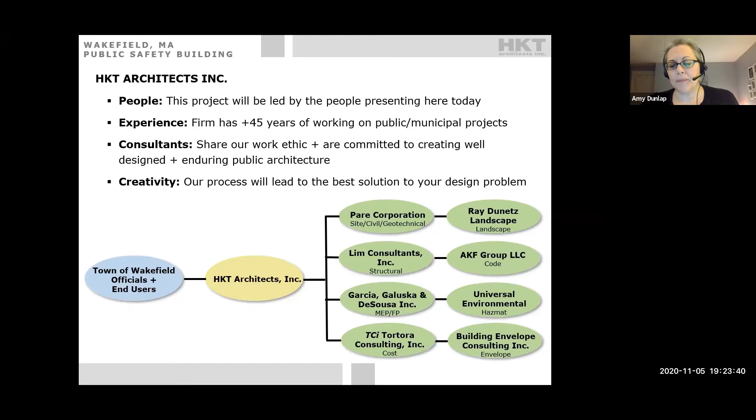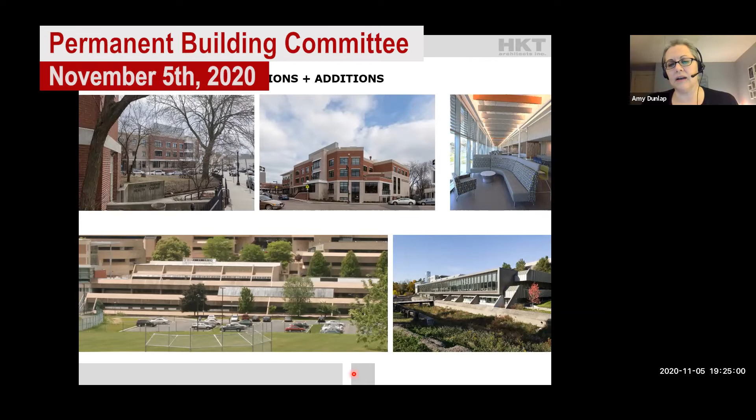We picked a couple of projects here to show you because of their complexity and their similarities to your project. Up here, this is an addition we did for the Codman Square Health Center. It's actually a unique partnership - they also work with the Codman Academy, a public charter school. The Codman Academy rents space on the lower level of the health center, and they work together to make sure the students have access to the staff and are mentored and learn about careers in healthcare. This was a project where we did a large-scale addition and renovation to the health center.

At the same time, the health center and the school needed to remain fully operational during the renovation. So we worked with a construction manager to target almost surgical renovation bits. We would quickly renovate office spaces or conference rooms into temporary exam rooms so they could continue seeing patients all through construction. We'd work with the CM and the healthcare staff to make sure all the timing worked perfectly so none of their patient care was interrupted.

And for the school, we worked to make sure all of their classes remained in the building. All of the work was done over summer vacation and winter vacation so they could continue educating the students. And this below is a large-scale renovation we did for Holyoke Community College.

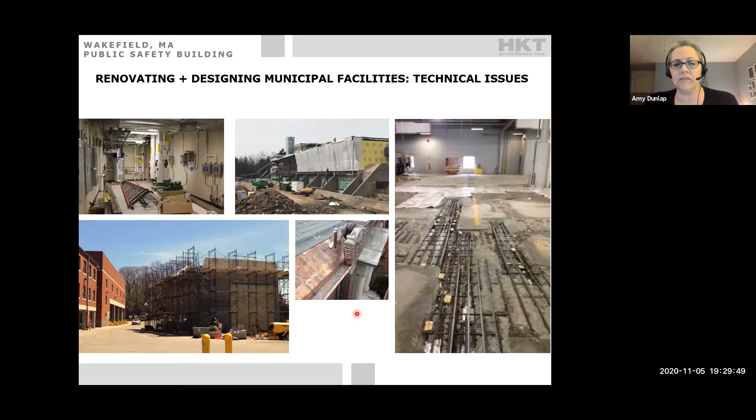But public safety buildings are what a lot of our work is these days. We have a project right now in construction in Tewksbury - it's a fire station. We have a project in Ashland, Mass. - that's a public safety building just going out to bid. We have a couple of public safety buildings that have just finished their feasibility studies, and communities are going to be going for funding in the spring.

It's a lot of what we do and what Janet and I do together. We know the different specialized spaces that go into them, and we know how to make them successful and really meet your needs.

We listen to what you're looking for, and we make sure that we respond to it. I know that you've had some issues with your entry sequence and how the public interacts with the meters and greeters in the station.

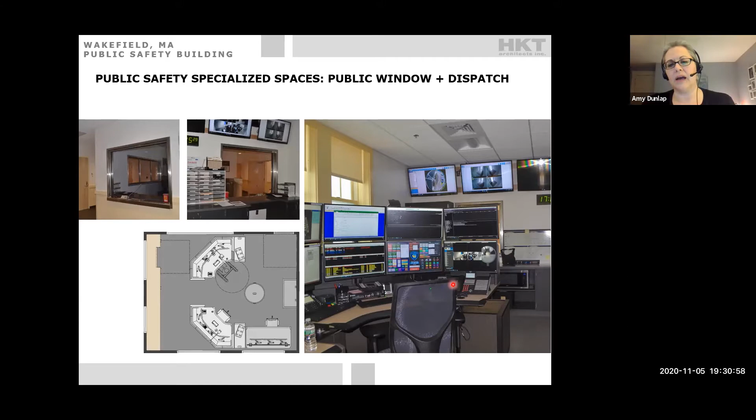So this is an example of what a modern day station should look like. You should have a window where the public can come up to, where the meters and greeters can meet their needs and talk to them, and yet all of your dispatch equipment is concealed behind that with all these large screens that no one in the public can see.

There are lots of other people spaces that go into these public safety buildings, and we believe it's really important to make sure that they have lots of natural light, that they're good working environments for the people who are going to be there day in and day out.

And Janet, you want to take this over? So I'm going to talk about what we've done on our study. We were asked to review the existing facility, evaluate safety and operational aspects, evaluate the current and future needs, and then develop a plan to meet those needs. As you all know, the building was renovated and the addition was done in 2003, so it's a relatively young building, about 17 years old, although the police station building itself is from 1950, so it's a much older structure.

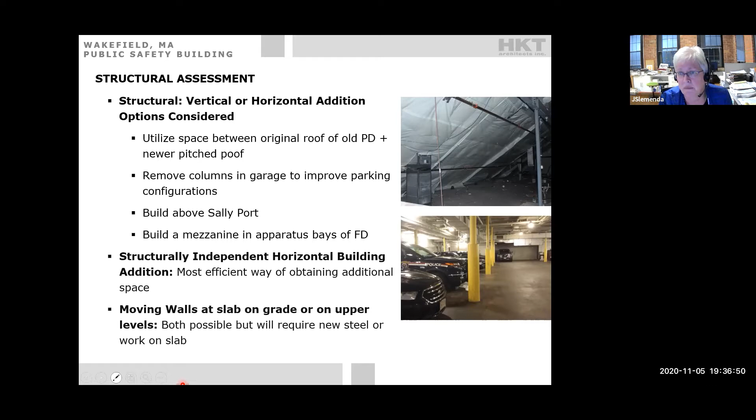So we did a pretty extensive structural report. And then the other ones we did were mechanical, electrical, plumbing, and fire protection. Basically, you've got good guts in the building for electrical, plumbing, and sprinkler systems. There could be improvements in the electrical department, but it's just at the midpoint of its expected serviceable life. You can certainly reduce energy with LED fixtures, things like that.

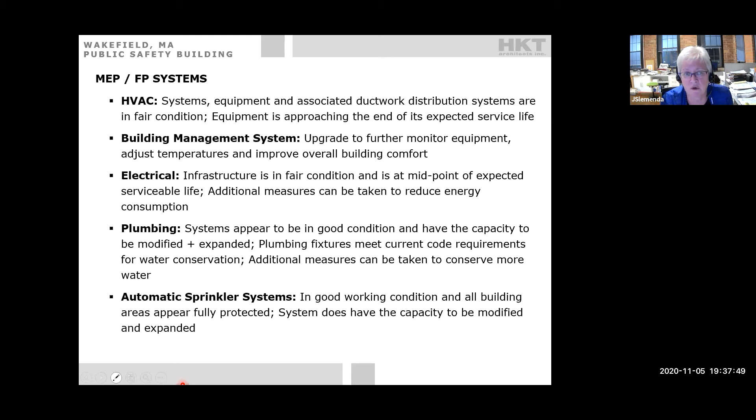Plumbing was in fairly good condition. They meet code requirements, and the sprinkler system has capacity to be modified and expanded. The big one is the HVAC system. It's already at the end of its expected service life, and it's where we see the most problems with maintaining proper heating and cooling. You can see it in the 911 area - they've had to add little split systems to keep the individual spaces functioning well. So we know that's a big issue.

What we did through programming - you probably all know this, but I'm going to go through it quickly - what the challenges in the lobby are. The entry sequence does not really work for either department. There is a records officer there sometimes, and they do firearms work there, but there's no meeter and greeter there 24/7, as in most public safety facilities. To get to the fire department, you have to know to go to the end of the hall, enter a door, and go down the hall to get to that office. So people that need immediate help, coming to the police department and the fire department, oftentimes have to go pick up a telephone and call someone.

Not a very good situation. I was at many meetings in this building and can't tell you how many times I personally witnessed people being interviewed in the hallway or in the lobby with other police officers, fire personnel. It felt like I was invading their privacy. So I know that it's a bit of a challenge.

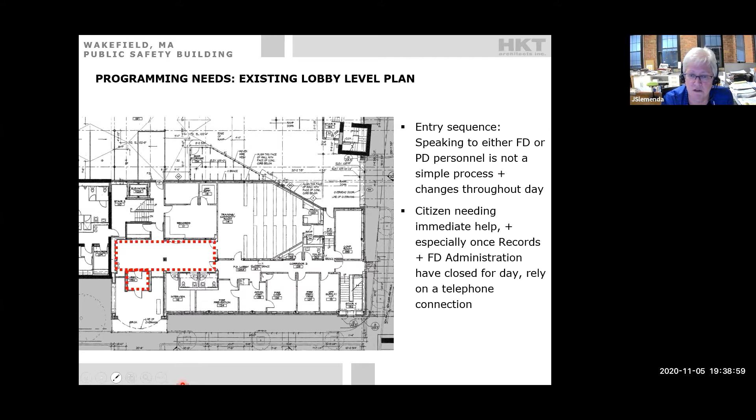On the next slide, you'll see the details of what's on that lower level. The police department is actually on 6 different levels of this building, so the floors do not line up - the addition does not line up with the existing building. In the lower level, they are pretty jammed in. Small rooms that were originally planned for armory and arms storage are now occupied by personnel - those are the green shaded areas. Most of the rooms are essentially undersized, especially the roll call, lunch rooms, and locker rooms. There's a problem with generally all those spaces.

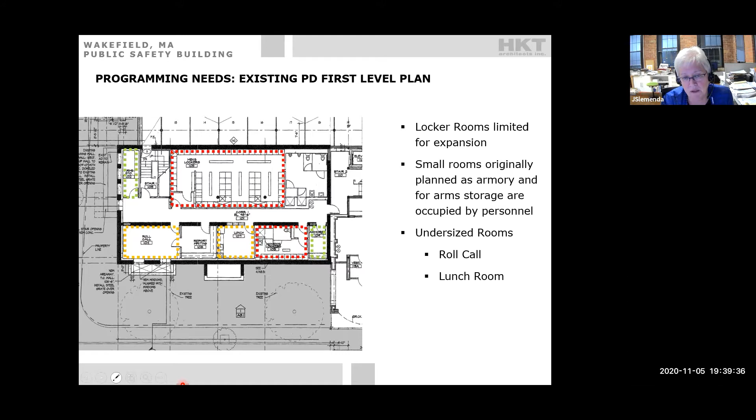The next slide shows the problems on the second floor: the dispatch location and the officer in charge location is remote from the public and doesn't really meet the needs of the current community. Their one green conference room is the only conference room for the entire police department. It's rather small, with a lot of furniture inside to store records and have a meeting room, and there's no room for expansion in any of these spaces as it exists.

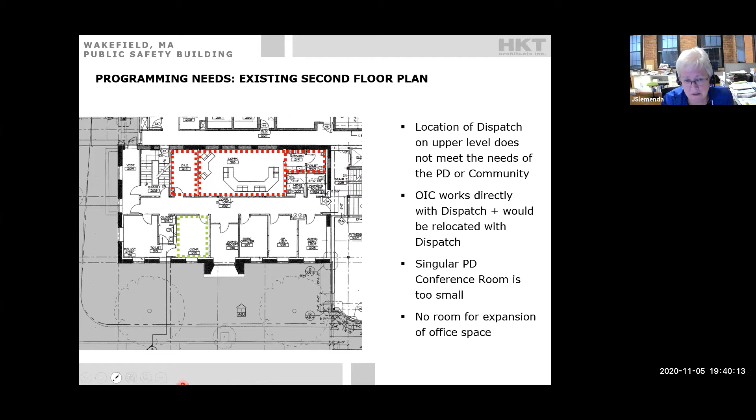On the third level, it works pretty well for the detectives. The big problem is where the evidence is - it could be larger and better located. The one thing about evidence is all about chain of custody: where does the police officer enter the building with evidence, what does that person do with it, so the whole process of moving it from collecting that evidence to being tagged and bagged in a secure area. This particular evidence is on the top floor, very far away from where any of the police officers enter the building, enter the vehicles, or enter the Sally Port locations.

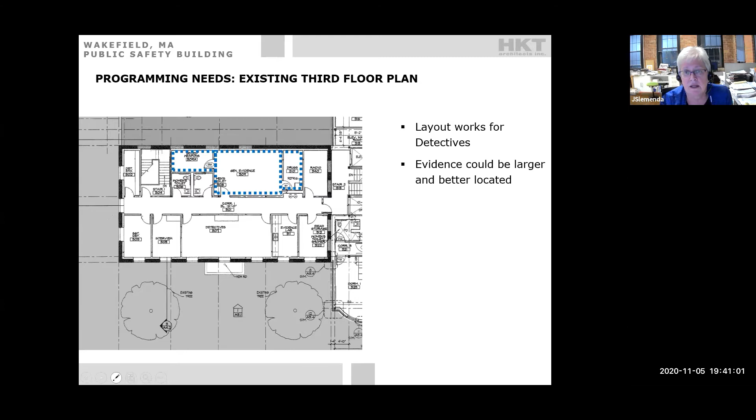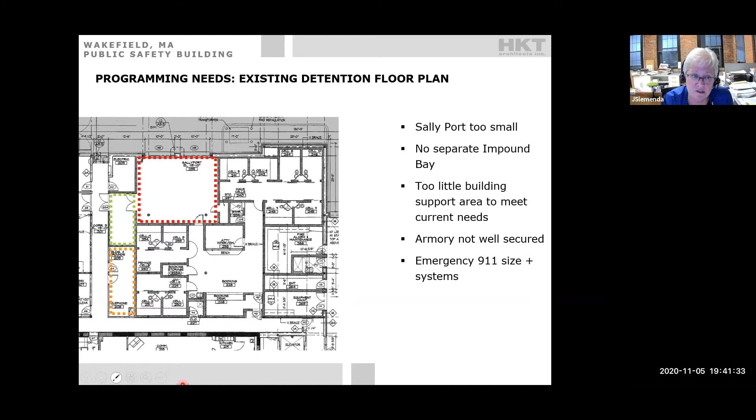Next, in the detention area in the rear, the Sally Port is rather small. There are columns in the corners which create problems. They have no separate impound bays - there's just simply too little building there to support the current needs. There's also an armory that's not well secured; there's a door from the Sally Port into the armory, not such a good idea. And the 911 spaces and systems are not in the right locations. And of course, right above those is all the mechanical spaces on the roof.

So here's your existing floor plan. You know what the building is. It has underground parking, and it's on a hill. There's underground parking underneath the main floor on the upside of the hill. On the lower side of the building is the entry and the community room. The police department is to the left, but on a different level.

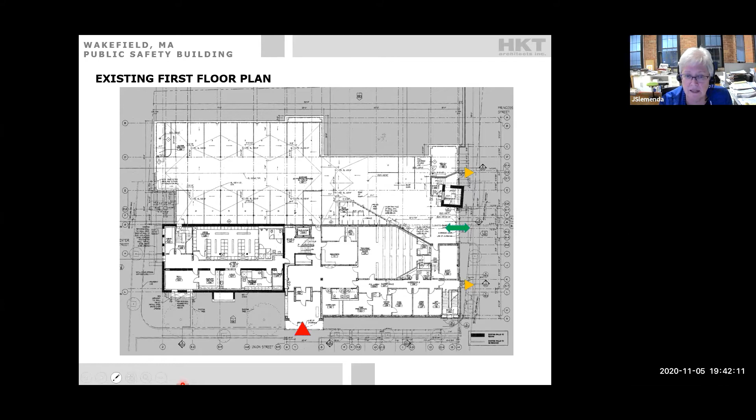That core space with the stairs and elevator is quite complicated. Elevators get you to each of the floors, and stairs move you up and down to traverse those 6 levels. So what we proposed is to add to the building, to move the entry, to add to the front of the building, and to reorganize the sequence.

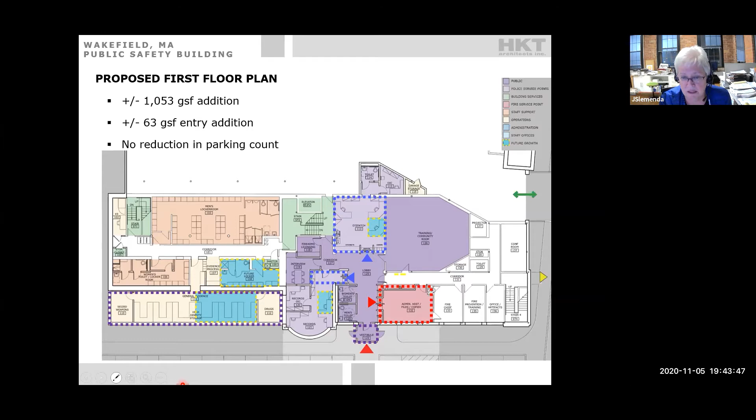The next slide is the second level up, and this is the level where the apparatus are. You can tell that the apparatus floor is above the community room that you probably all met in, and it goes out underneath that big apparatus bay. The Sally Port is up on the upper left with the double arrows. That's where the apparatus come in and out. And so that's the plan above parking and above the first floor.

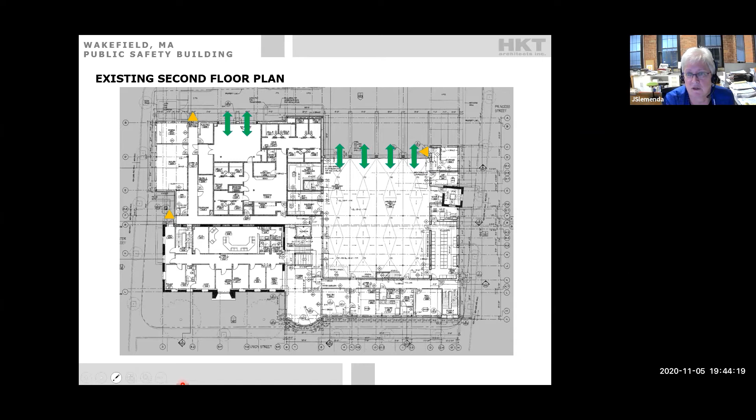What we proposed to do here was do that same addition in the front of the building and pop out the rear where the Sally Port is. Unfortunately, we can't go wider there, but we can get some depth to it. And by doing that, it allows at least the doors to be closed when they're transporting a person who's been detained.

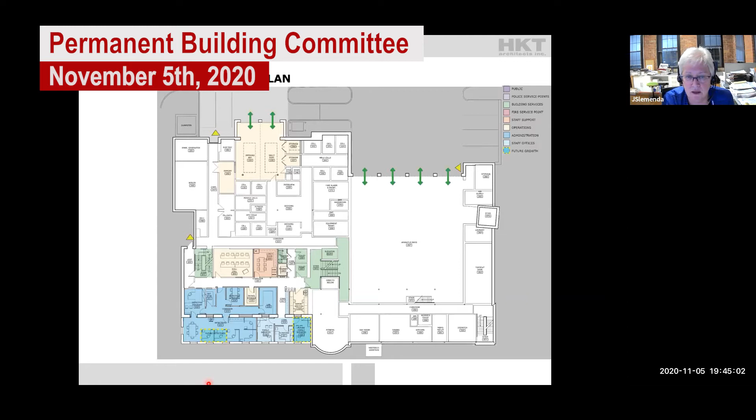We are taking a couple cells, an extra cell or so, and turning it into more storage rooms, and separating the impound and the Sally Port, so that they can actually process a vehicle in there if they need to. The details of that on the next slide are the same addition.

In this particular case, we're moving the detectives from the 3rd floor to the 2nd floor, and we're creating a new small group of family services, clinician and future family services. So instead of being in the basement in closets, they now have full office space with windows.

They can continue to meet with people either in an area on the 1st floor that's a bit more secure or on the upper level. We also moved the roll call room and the lunchroom from the basement up onto this upper level, and created a better size for each of those rooms and a better location, more directly related to their operations.

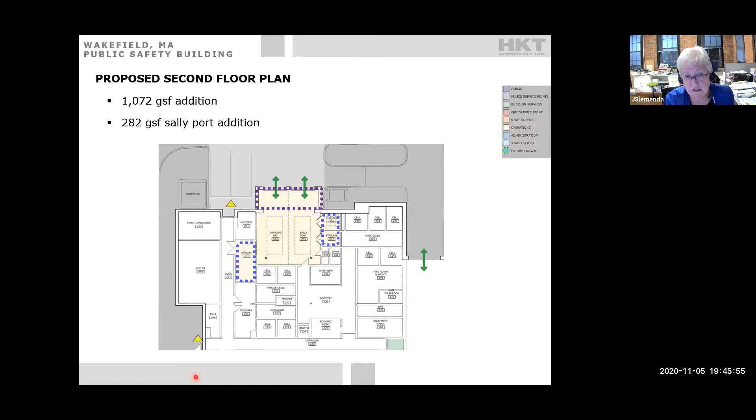And this is the rear area in the back where we're adding on, picking up the storage, picking up that additional area for the Sally Port and the impound bay, to work on the armory. And of course, anything we do to these buildings will include the tel data rooms, the 911 rooms, all the mechanical rooms as well, which are all in this portion of the building.

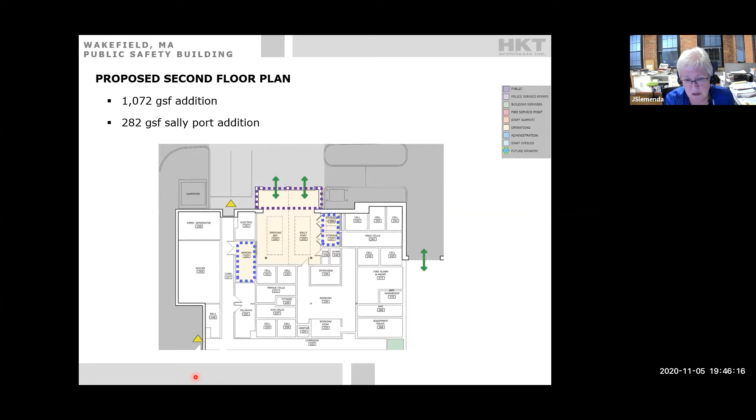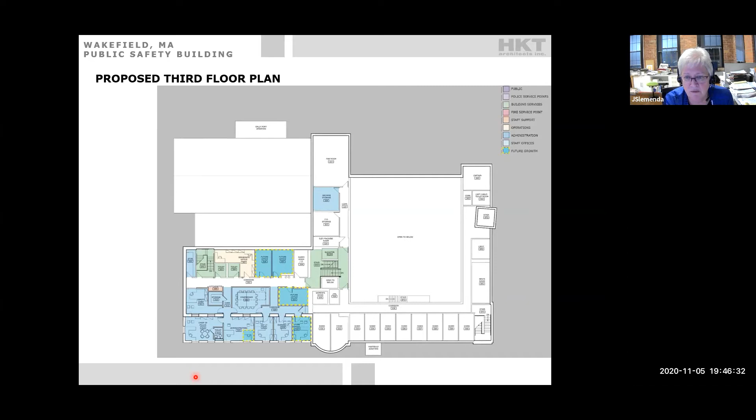And then the 3rd floor, again, not a tremendous amount of work. Again, in the next slide, it'll show you that it has the same addition in the front, and a reorganization of the spaces. The next slide, at this larger scale, shows this becomes the police administration spaces.

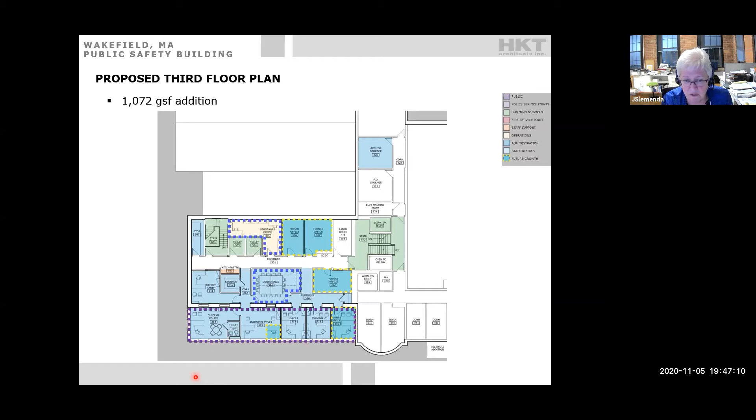So we're moving them from the front door of the building up to a more appropriate place on the upper level, and creating adequate conference rooms. We're creating a sergeant's office, and we have a little bit of space for some future offices. And what we all know is police departments change regularly, how they operate, their requirements change as new programs come in, and this provides a little bit of extra space for them to provide for that.

And then finally, what we would do going forward, we would obviously be working with the OPM to establish a schedule and a process going forward.

There are things that we did not do that weren't necessary in the study. We did not complete a survey because we didn't know what we were going to do. We did not do geotechnical engineering for where the additions would go.

We'd also want to confirm the program and the expectations of the projects. A couple of years have passed and things change, just like what we talked about, so we would be relooking at that and making sure we had everything we needed. We would confirm the budget to make sure it remains on track with the expenditures expected. And then we would begin the final design and construction document process and any permitting as required.

And that's our presentation. So.